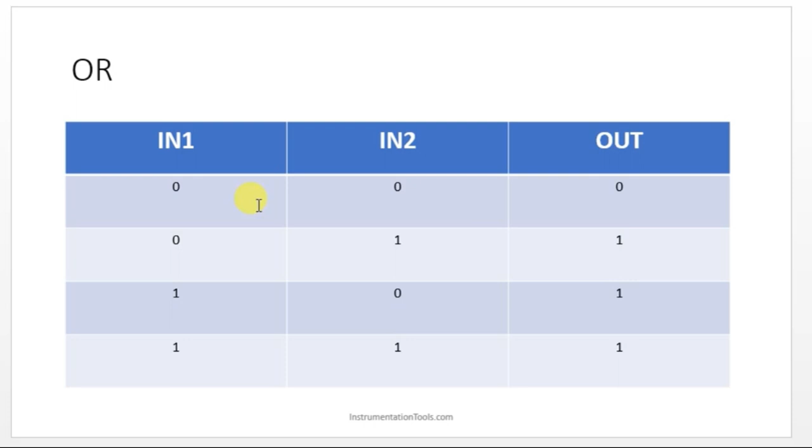So let's see about the OR truth table also. OR is like opposite to AND. If any one input is on, output will be on, correct? NOT is having only one input, which means it's like a complement. 0 means 1, 1 means 0. That's it. So let's see AND gate in CX Programmer.

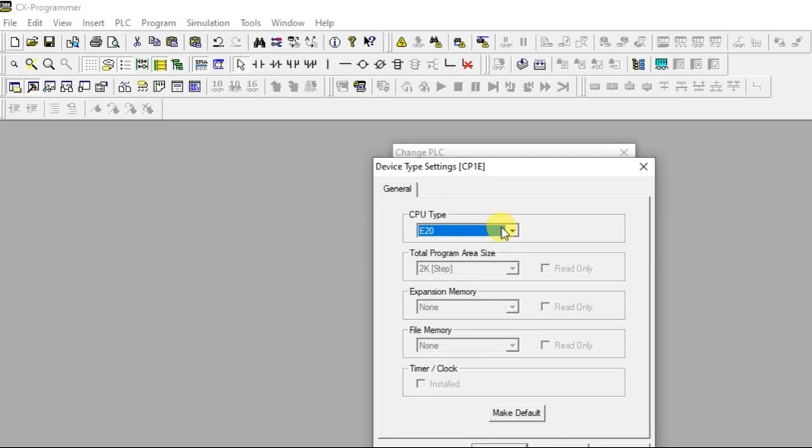So I'll create new project. So it's created. As we have seen, we need two inputs, right? So I'm going to use normally open contact, and I'm naming this as in1. Sorry, this has to be addressed right. 0.00. Just click enter, and it is asking for the comment, and give this as in1. Click OK. And let's take one more input.

So now we have to use one more input. Where are you going to keep that input, whether in the same rung or in the next rung, and how are you going to connect these two inputs to perform the AND gate for that particular output? So think about the truth table now. If both the inputs are off, output has to be off. If both the inputs are on, output has to be on. Both the inputs must be on.

That means what? It should be in series. You can confirm this statement with these two also. If any one is off, output has to be off. That means in the series, if any one input is gone, you cannot get the output. So AND gate is nothing but connecting two inputs in series to get the AND performance in output, right?

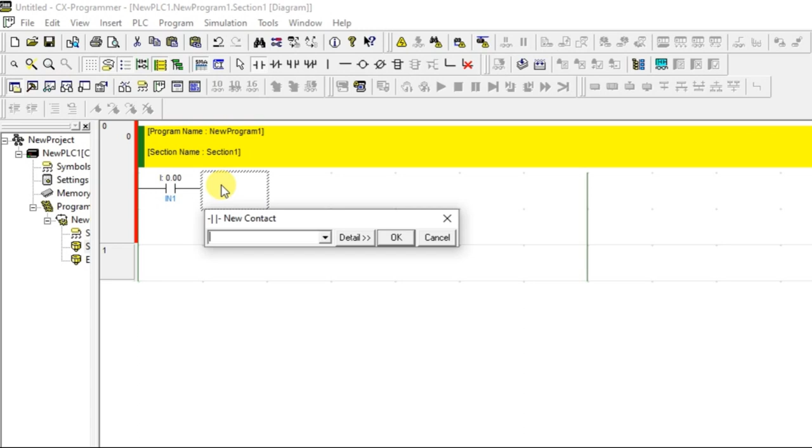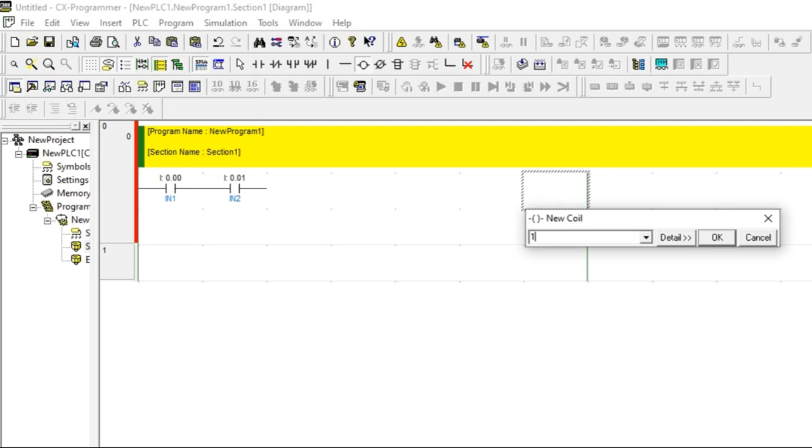So let's see that. I'm going to put the second input in series to perform the AND gate. I'm naming this as in2 and take an output, and I'm giving an address and naming that as out, right? Going to connect this rung with horizontal line, right? So just click on escape. Now both the inputs are connected in series with the output.

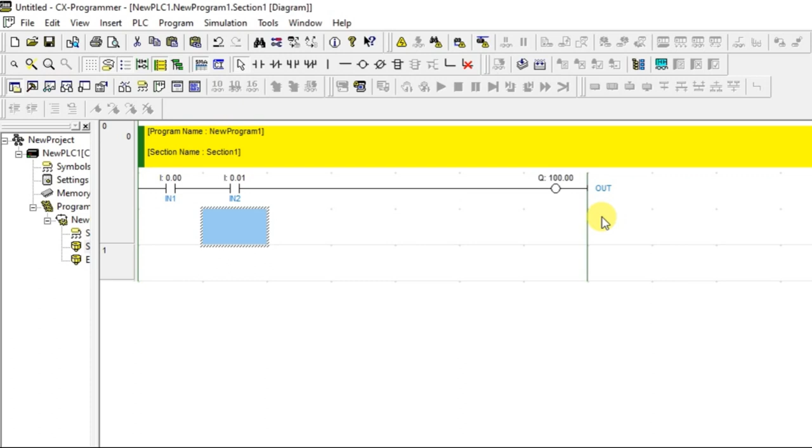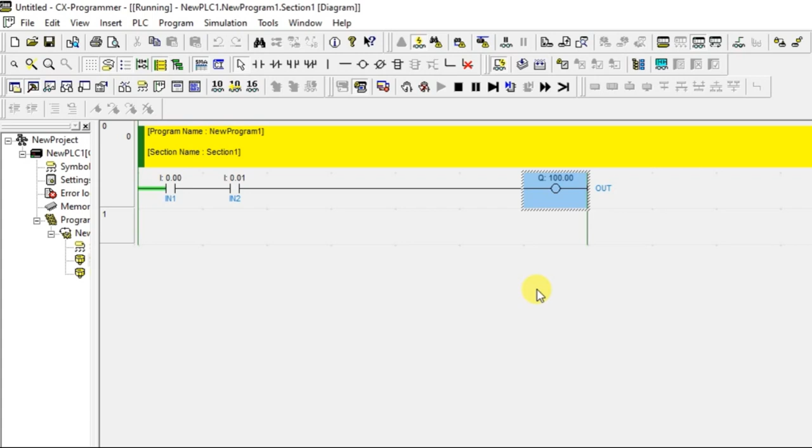So let's see whether we are going to get the result for AND gate or not. I'm entering into the simulation mode. Fine. So now the rail is active. Let's see the first condition, 0, 0, 0. I'm not turning on the input, and this also I'm not turning on. Output is also 0. So the first condition we have achieved, right? Let's take 0 as off condition and 1 as on condition. Both the inputs are off, output is off.

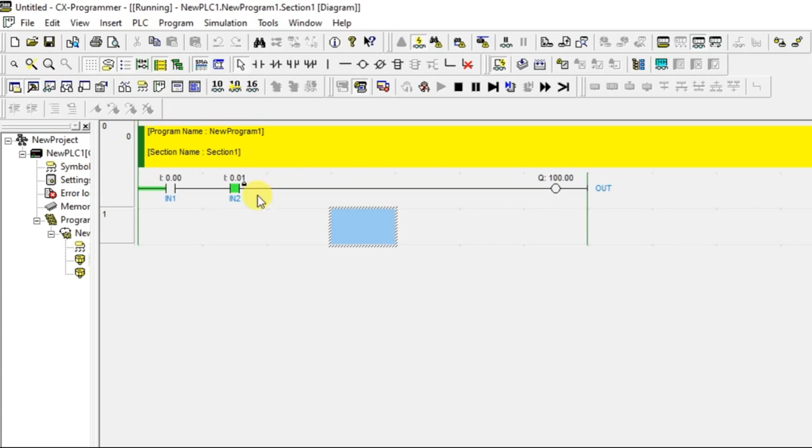What is the next one? 0, 1. We are not going to disturb this first input. Let's turn on the second input. So second input is in on condition, but still output is off. So the second condition we have also achieved. 0, 1, 0. Correct? 0 means off condition. So output is in off condition only. Yes. So what is our third condition?

1, 0. So first I'll turn off this. What do we have to turn on now? First input. Turn on. So now look at this. 1, 0, 0. So the third condition is also true. Third condition is what? 1, 0, 0. Correct. What is the last one?

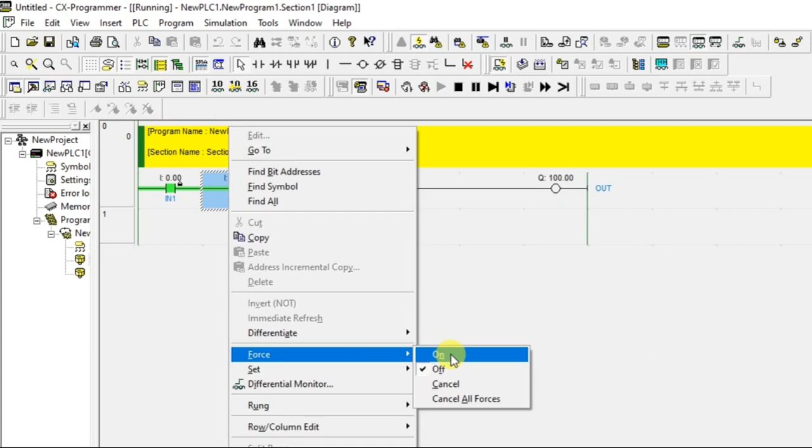1, 1, 1. Now I'm going to turn on both the inputs. Let's see whether output is in on or off condition. I'm going to turn on this, which is making my output on. Correct. So my output is on for 1, 1 condition. So this is nothing but an AND gate.

So to get the result for AND gate, you have to perform all 4 logic in one concept. It's not that each condition has its own rung and line. There cannot be different logic for this. This is the only concept for AND gate. You have to put both the inputs in series to get the result. Understood? So let's turn off both.

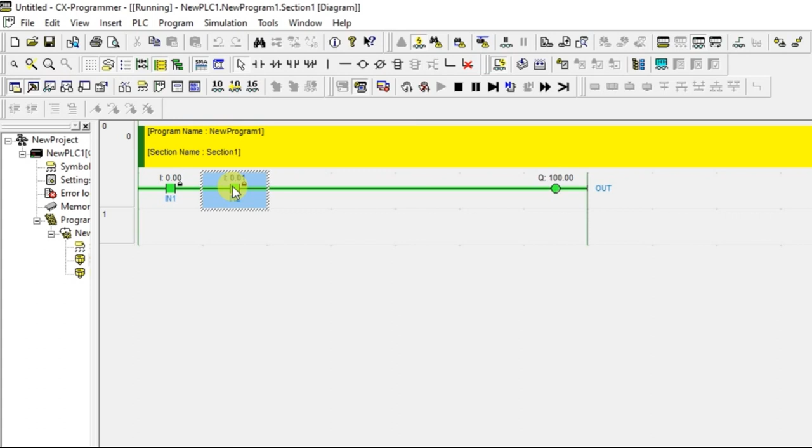I'm going to the programming mode. So AND gate we have done it. Correct? So let's go for the next gate, which is nothing but OR gate. So OR gate is what? Any one input is on means output can be on. If both are off, then only output has to be off. So let's see how to do that.

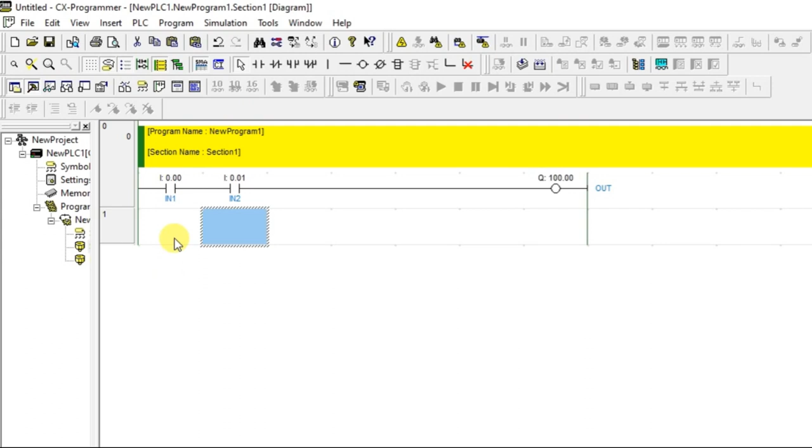So I'm going to use the same input. Now the question is how I'm going to connect, whether it is in series or in some other way. Series I have already done. If I connect that in series, it will become the AND gate. So what is OR? OR is like an option. This or this. So this or this means I can go for the parallel option. So what will this parallel option do? If any one input is on, output will be in on condition.

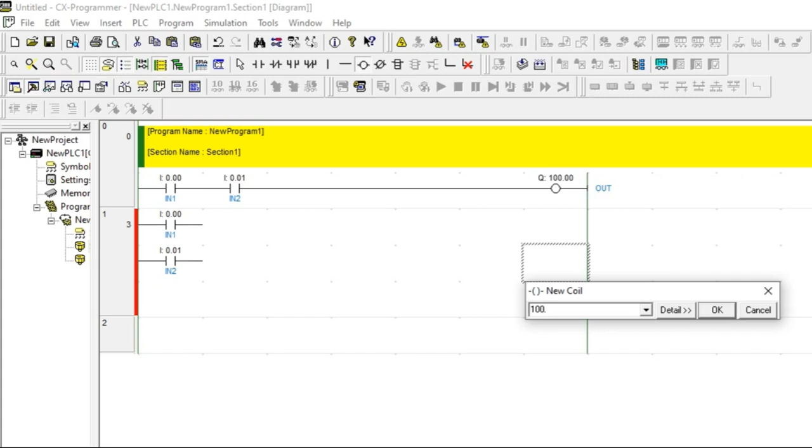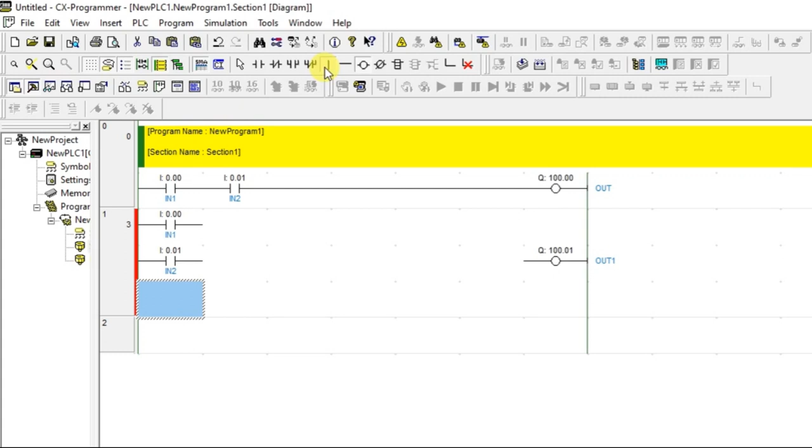So I'll give the same. I'm going to use a different output because I have already used 100.00 as one of the outputs. So I'll use 100.01 and name that as out 2, because that is out. So now let's name this as out 1. Right? So I'm going to connect these two using the vertical line.

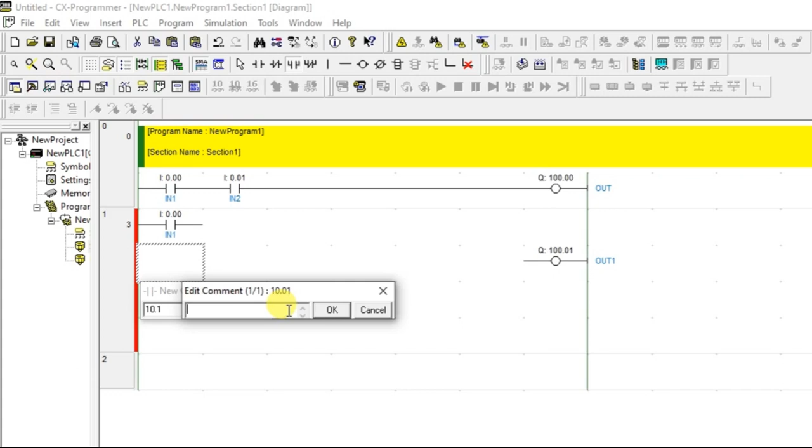So I'll do one thing. Just delete this. To get a parallel contact, make use of this one. There will be an option like putting a single contact over here and we can connect using the vertical line. So now you can make use of this option, new contact OR. If you click and keep it here, it will create a new contact. That's it. Immediately it will get connected. If you see, both are connected. Now you can put this here and you can connect as usual. Correct? So now it's done.

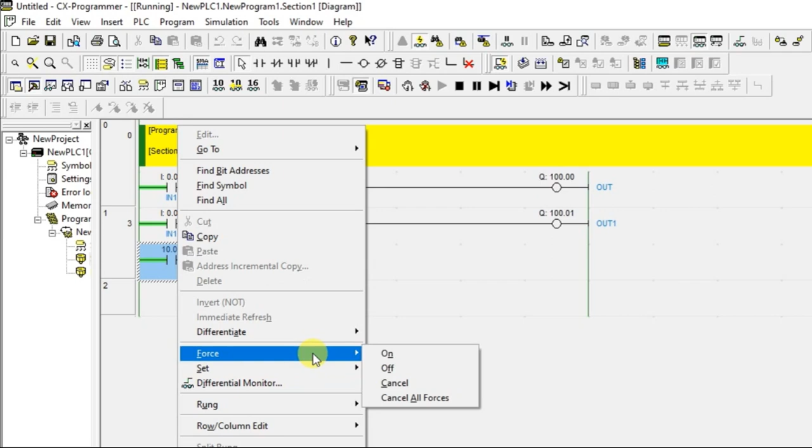So let's move on to the simulation mode. It is transferring and it is ready to use. Now OR gate is what? 0, 0, 0. The first condition is true. What is the next condition? 0, 1. So I'm going to turn on this input. So I have used some different address. This is not the same as IN2. So okay, let's do one thing.

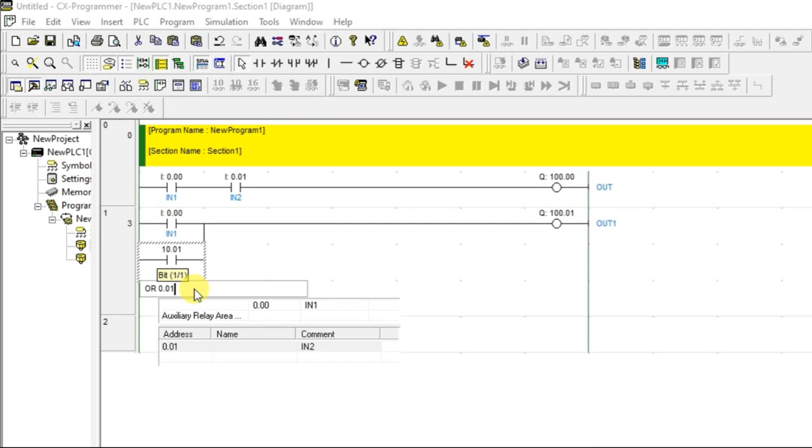Let's go to our programming mode and change the address of this. I'm going to edit. I'm giving 0.01. Right? So now this is the same address as this. Let's go to simulation mode. Now fine. 0, 0, 0. Now I'm going to do 0, 1. So this I'm not going to disturb, and I'm going to disturb this. On. So output is on.

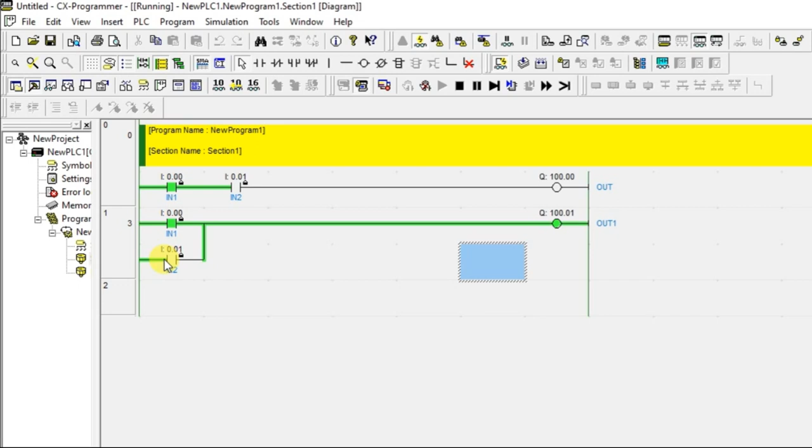So this is OR gate, right? You can see for the same 0 and 1 condition, this output is off, but our OR condition output is on. So let's turn off this and turn on the first one. 1, 0. So this is 1 and this is 0, but still output is in on condition, because 1, 0 is 1 in OR gate. Correct. What is the last one? 1, 1. So turn on this. Still this will be in on condition. So 1, 1, 1. So OR gate is done.

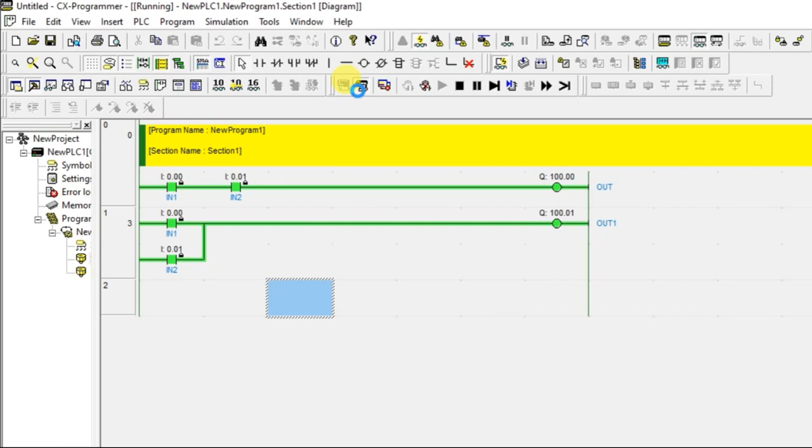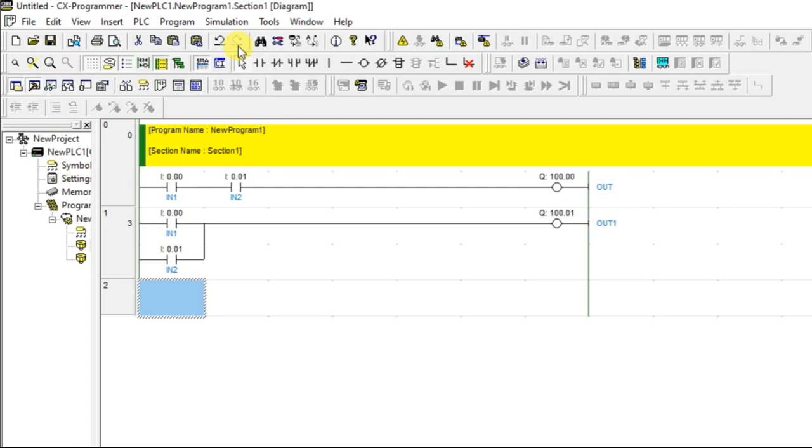Correct. So AND gate will also have 1 for this condition. 1, 1. When both the inputs are on, output will be on. So that's it about AND and OR gate. And we have one more gate, which is NOT. So NOT has only one input. If 0 means 1, 1 means 0. So how to perform this? Only one input. Let's take only one input, 0.00.

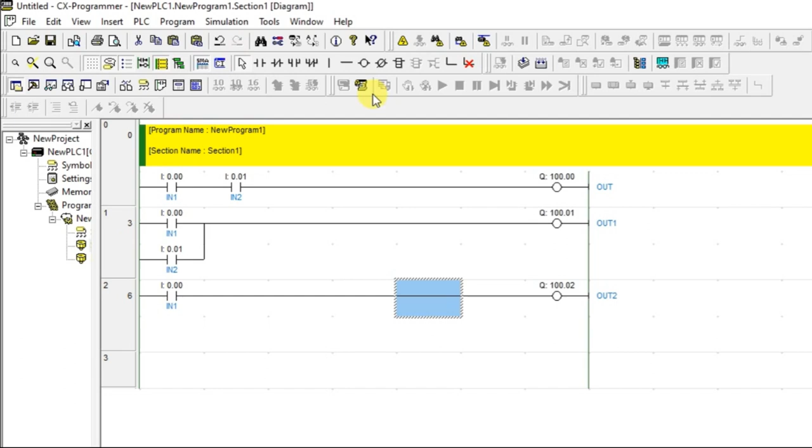Okay. So let's take one different output, 100.02. Let's name this as out2. And connect. Right. Fine. So now what is our condition? 0 means 1. Correct. So let's move on to this. Now see, my input is 0, but output is 0 only. But this is not my requirement. My requirement is what? 0 means output should be in on condition.

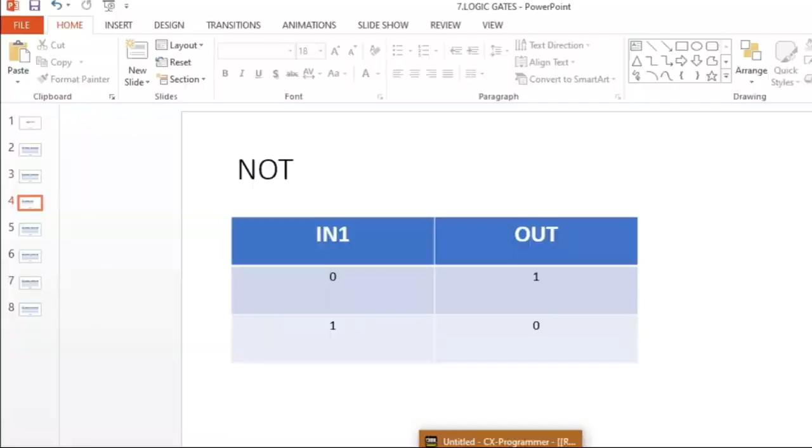But for a normally open contact, I cannot get the condition. So what I have to do? I have to go to the programming mode and think about it. Normally open contact is not working for NOT gate. So what I can do? Instead of using a normally open contact, I can use NC, normally closed contact. Give the same address. Just delete the normally open contact. Okay, fine. So now instead of normally open contact, I'm using normally closed contact.

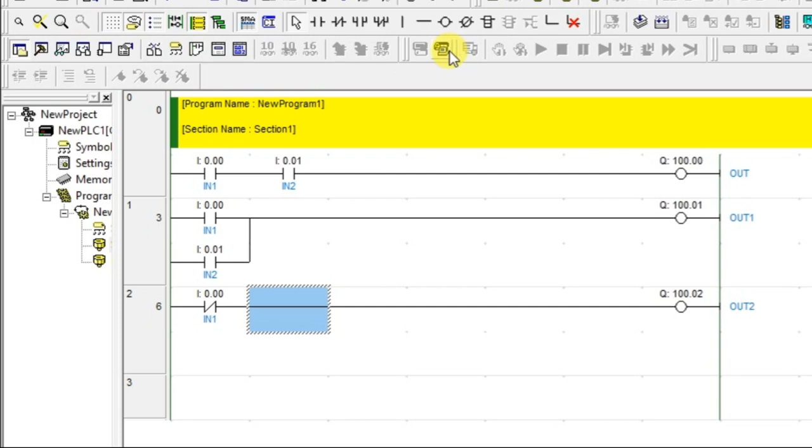Let's go to the simulation mode. Right. We got the condition. You have not disturbed the switch. That means you have not forced the input, but still output is in on condition. That is the working of normally closed contact. If you are not disturbing the input, output remains in on condition. If you change the state of that input, output will be off.

If I am forcing that to on, what is happening? Output is off. Correct? So this is NOT gate. So this is AND, this is OR, and this is NOT. So I hope you have understood the basic logic gate concept. I will meet you in the next session.